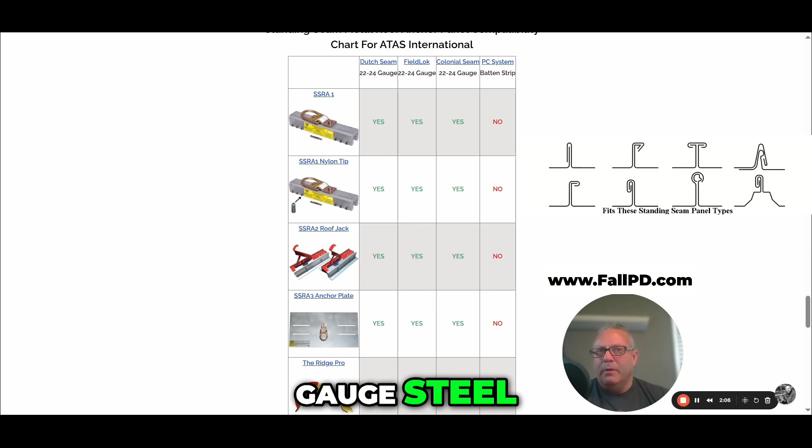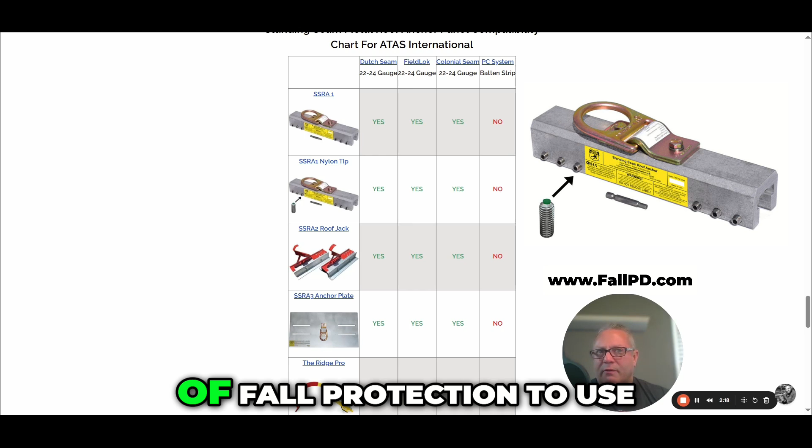So the SSRA1 with the cup tip, this is our standard anchor. This locks onto the seam with 12 non-penetrating set screws. This is going to be compatible with about 95% of today's standing seam panels, as long as they're 22 or 24 gauge steel and straight non-curved panels. Curved panels, that's more of a specialty in fall protection. You should have a trained safety expert inspect a roof like that before determining what kind of fall protection to use. So we're always talking about steel panels, straight non-curved.

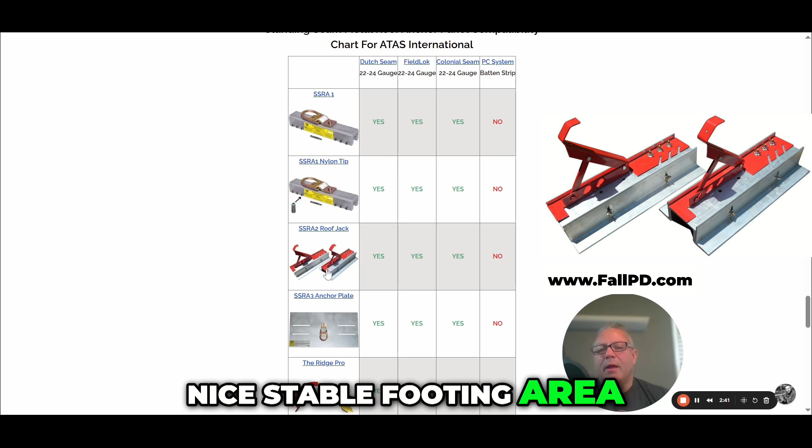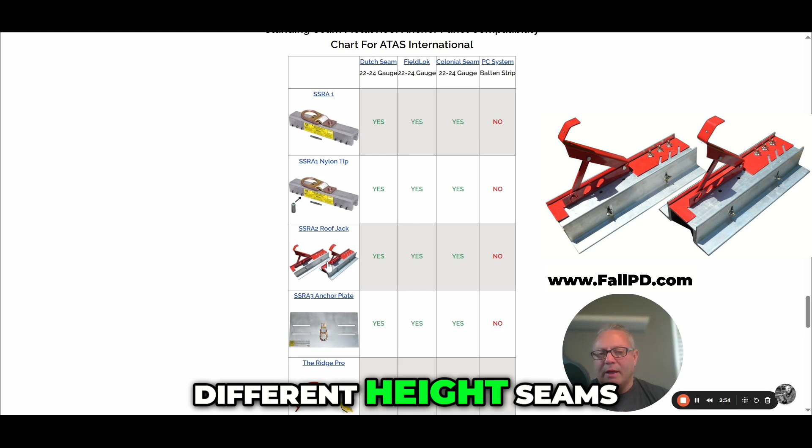Okay, so the great thing about these anchors is they accept adapter plates. So once a contractor owns a set of these, you can add adapter plates to expand the functionality. For instance, if you need to have 10-foot walkboards on a roof for your workers, nice stable footing area, you can add the SSRA2 roof jack adapters. The red adapter on top is adjustable for different pitch roofs, and the side feet are height adjustable for different height seams. You want to keep those feet down on the panel so when you're walking on the boards, they're not wobbling all over the place.

So this is a very versatile product, and these mount right on top of the SSRA1s with the D-ring removed. And you can put 10-foot walkboards with one set of SSRA2 roof jacks. The next adapter is the SSRA3 Anchor Plate. So this is for adding temporary horizontal lifelines to standing seam roofs without penetration. So this SSRA3 plate is going to mount on top of 2 SSRA1 anchors with the D-rings removed, and you'll have one of those assemblies at each end of a 100-foot horizontal lifeline.

Now remember, you don't have to go to 100 feet. We do sell a kit that includes a 100-foot rope, but if you need 63 feet, there's a rope tensioner. You can use that 100-foot rope and just tighten it down to 63 feet and mount your plates the appropriate distance, and you can make it any distance shorter than 100 feet as well. You're not stuck at 100 feet.

So an alternative product that we recommend is the Ridge Pro. This is called the Ridge Pro Steep Assist, and what this is really good at is on 6/12 to 12/12 pitch roofs on almost any roof type. This can provide an anchor point for a single worker. So this mounts on the end of a 16-foot pole. As you see, there's a wheel on there.

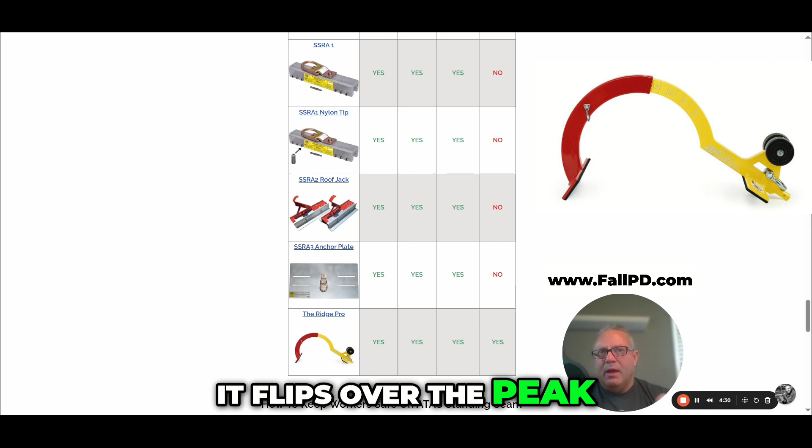The worker can be on a ladder. He can run it up with the pole on the wheel, flip it over the peak, and when it goes up, it brings a vertical lifeline with it. So as soon as it flips over the peak, it's providing an anchor point for that worker. So as soon as he steps off that ladder to the roof, he's 100% tied off. So he can do the task he needs to do, safely get back to the ladder, and he's tied off that entire time. And once he's safely back to the ladder, only then does he release the anchor and bring it back down. So very versatile product.

A lot of home inspectors, lightning rod installers, Christmas light installers, folks like that, they love the Ridge Pro. It's good for inspection tasks and simple tasks. Now, for long-term work, there are holes in the flange. You can mount this down and work all day on it if you want to. But the Ridge Pro, very versatile, different roof types. As long as it's 6/12 to 12/12, this is something we recommend.

And as you can see on compatibility, it's all the way across because you're not relying on that batten strip. You're not relying on how thick a seam is. You're just hooking over the peak of the roof. So the whole structure of the roof is actually providing the strength for that in the event of a fall.

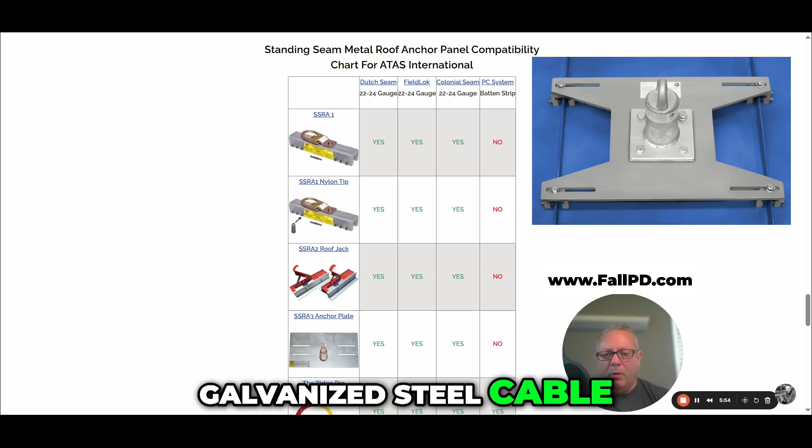So one other solution, we have a very unique kit that we sell. It's for more permanent horizontal lifelines. So for these panels, the Dutch seam, FieldLok, or Colonial seam, if you feel like a more permanent horizontal lifeline is required, galvanized steel cable, plates, posts, we do offer a 120-foot kit.

We work with Super Anchor on that, and they provide the parts for that. And that's just a great solution out of the box. Gives you 120 feet, gives you the post, the intermediate post, the end post, the cable, the termination equipment. Really good solution for the Dutch, FieldLok or Colonial seam for ATAS.